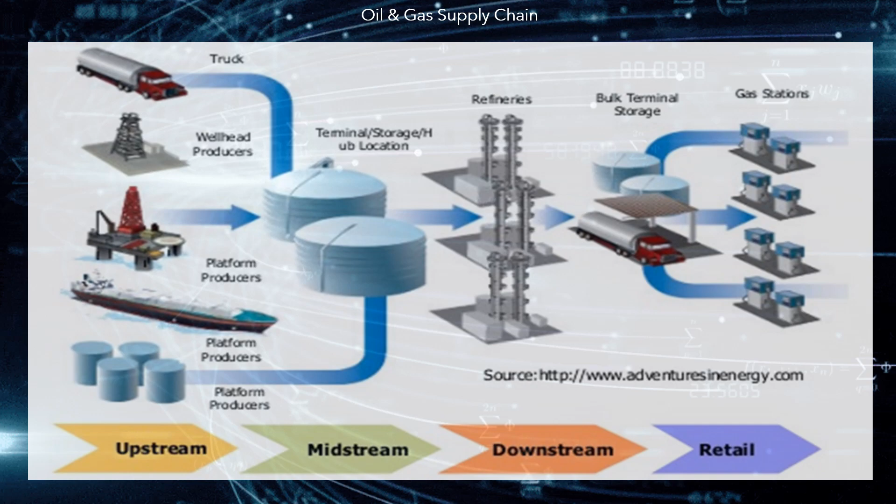HAi is a company at the forefront of high-performance artificial intelligence. Oil and gas industries enterprise-wide optimization. Oil pipeline real-time optimization. Oil supply chain optimization. The oil and gas supply chain is made up of 4 links: upstream, midstream, downstream and retail. The links are connected by multimodal transport networks.

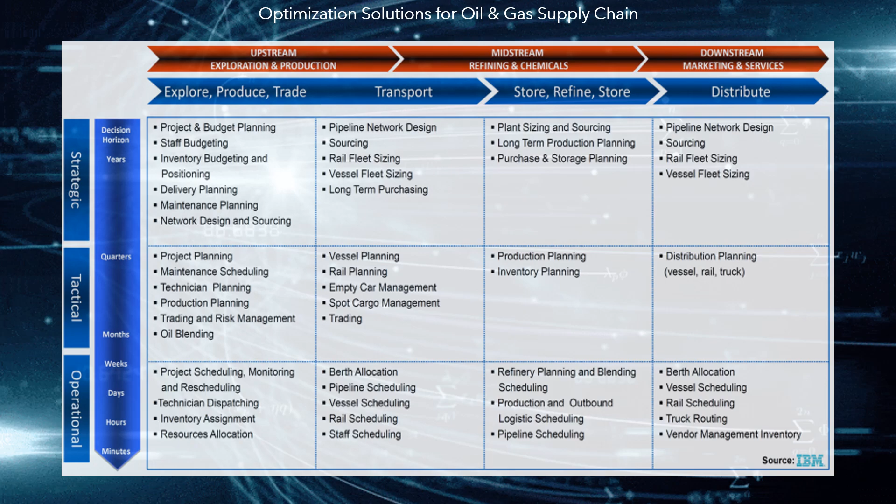The oil industry includes global processes of exploration, extraction, refining, transportation and marketing of petroleum products. The largest volume products in the industry are fuels, natural gas, fuel oil, and gasoline. However, petroleum is the raw material for many chemicals, including pharmaceuticals, solvents, fertilizers, pesticides and plastics. The table, elaborated by IBM, shows a summary of the optimization solutions for oil and gas enterprises.

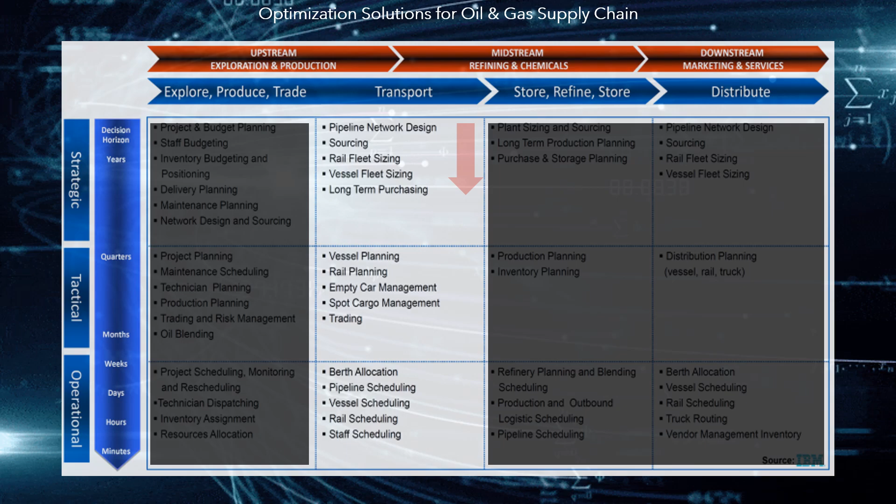Optimization solutions in the transport chain of petroleum products can be classified by their hierarchy: strategic, tactical, and operational. Several of these applications will be discussed below. Oil enterprise-wide optimization integrates mathematical models for each of the links in the oil supply chain, in such a way as to manage the planning of the supply chain with a holistic vision. The design of HAi Oil EWO was the result of work done for a multi-business oil company.

The union of models, and their coordination, forms the hypothalamus of an oil enterprise. The current computational power allows modeling the supply chain in detail, considering individually all the systems that compose it. This allows visualizing all the existing bottlenecks that affect the maximization of economic gains. All models developed by HAi to support decisions in the oil industry are interconnected through an information system. In this way, the construction of an artificial hypothalamus is a question of joining the equations that make up the different models.

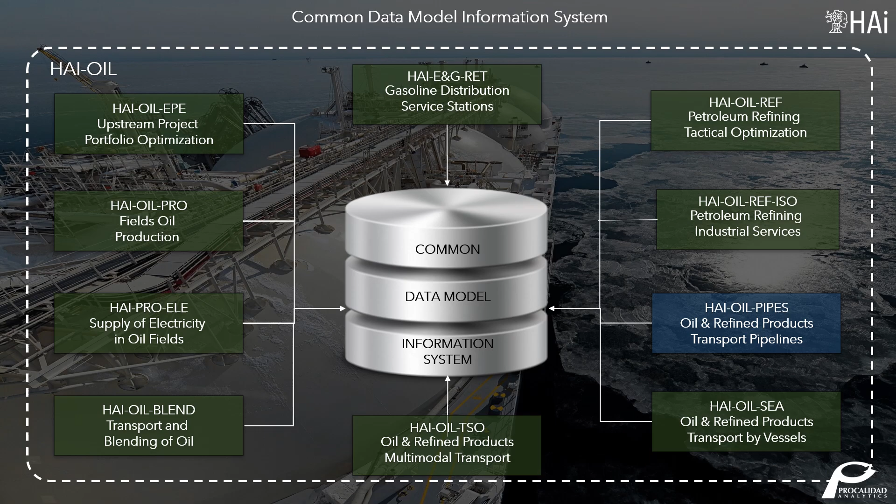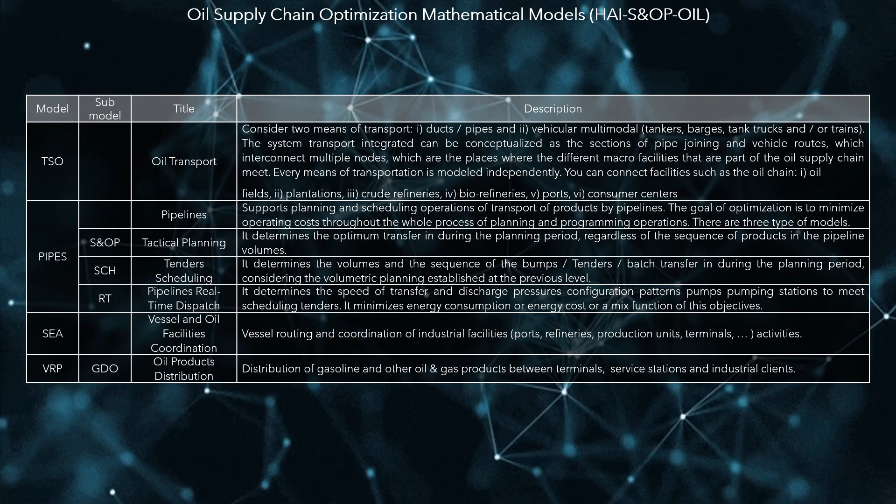Oil transport systems optimization corresponds to a general model, common to all types of oil products, raw, refined, natural gas and biomass, which represents the process for a specific system, including particular equations when this is required. It considers 2 types of transport modes: pipes and multimodal vehicles, like vessels, barges, train tanks, and/or truck tanks. The table presents a summary of the mathematical models developed by HAi for oil and gas transport optimization.

Pipelines planning and scheduling. The problem of optimization of pipelines involves safe, reliable and economical operation, in which, for each moment of the planning period, the flows, pressures and configurations of the pumping stations must be determined, according to the different types of products that must be transported through the pipeline network. The goal of the operation moves between 2 criteria. Minimize energy consumption, environmental criteria, which is important to preserve the sustainability of the planet. Minimize the cost of energy, economic criteria, which is important in energy markets where rates change throughout the day.

On the other hand, the technical operating conditions, hydraulic conditions along the pipelines and at the pumping stations, must be respected regarding the flow of multiple different products that must flow through a network of pipelines that involves the synchronization of multiple sections that connect several production fields, refineries, and ports. The planning and scheduling of transport operations of products through pipelines, oil and refined products pipelines, aqueducts, gas ducts, and mineral pipelines, is done using 3 coordinated models.

Sales and operations planning, S&OP, determines the total optimal volumes transferred during the planning periods, regardless of the sequence of products in the pipeline. Scheduling operations, SCH, determines the volumes and the sequence of batches to transfer during the planning period, respecting the volumetric planning established in the previous model. Real-time optimization, RT, determines transfer speeds, discharge pressures, and pumping stations operation patterns, to meet the scheduling of batches. The equations in the 3 models are virtually the same. The difference is in the way the energy losses are calculated, and the operations of the pumps are handled.

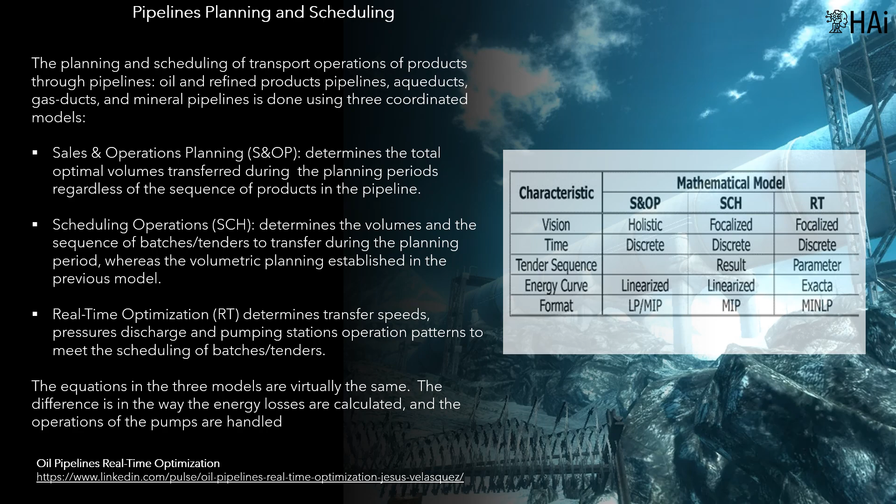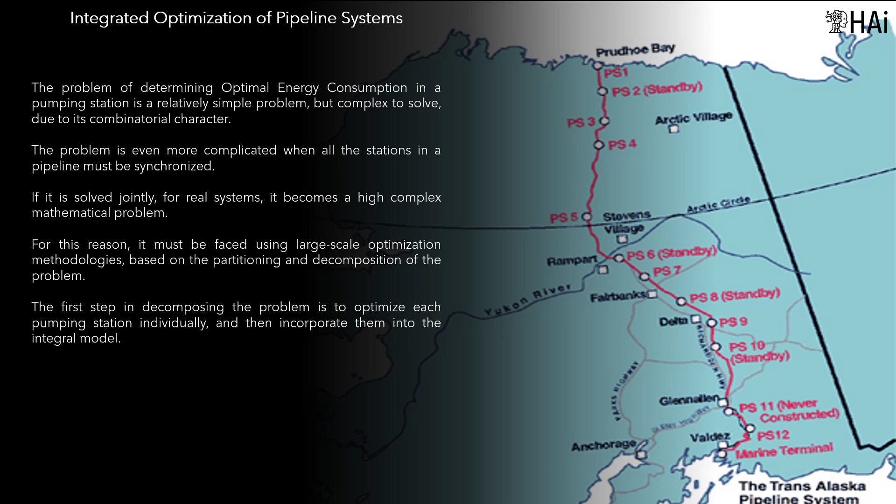The integrated optimization of pipeline systems requires that all the pumping stations be considered jointly. For real systems, it becomes a highly complex mathematical problem. For this reason, it must be faced using large-scale optimization methodologies, based on the partitioning and decomposition of the problem. The transportation system has two fundamental components, the pipeline system and the pumping stations. The real-time models include nonlinear modeling that determines the amount of energy consumed based on the flow of products in the system.

In aggregated models, when multiple types of products can be transported in the pipeline, the total transport time must be divided into the time used to transport each type of product at different transfer rates. To represent the flow of energy through the transport system, the following constraints should be considered.

Energy conservation in the ducts and nodes of the system. Minimum pressure limits, or compression, at the outlet of the ducts, and pressure, or compression, minimum input to the ducts, depending on the type of connection between the operational area, node, and the duct.

In the real-time model, a detailed hydraulic system is available in the pump operation model, for each type of pump in the pumping system, and each link in the pipeline, for each type of product or crude. This ensures the feasibility of the results.

Drag reduction is a physical phenomenon that causes friction to be reduced, and fluid flow to be increased. Chemicals that reduce drag are known as drag-reducing agents, DRA. Several polymeric compounds can reduce the wall shear stress of flowing liquids at low concentrations.

Thus, the use of DRA has the following advantages: increased pipeline capacity, the throughput; savings in pumping power; pressure reduction with the associated reductions in pipe thickness and pressure surge; and reduction in pipe diameter in the design phase, as well as the number or size of pumping facilities.

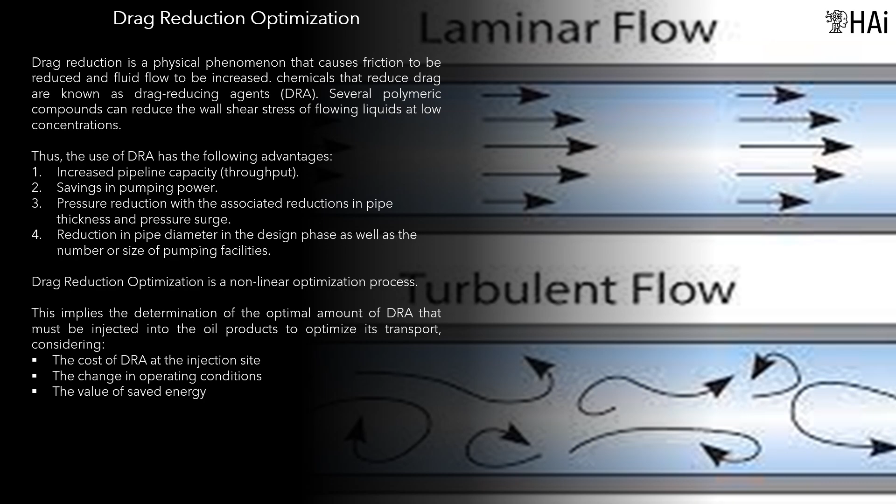Drag reduction optimization is a nonlinear optimization process. This implies the determination of the optimal amount of DRA that must be injected into the oil products to optimize its transport, considering the cost of DRA at the injection site, the change in operating conditions, and the value of saved energy.

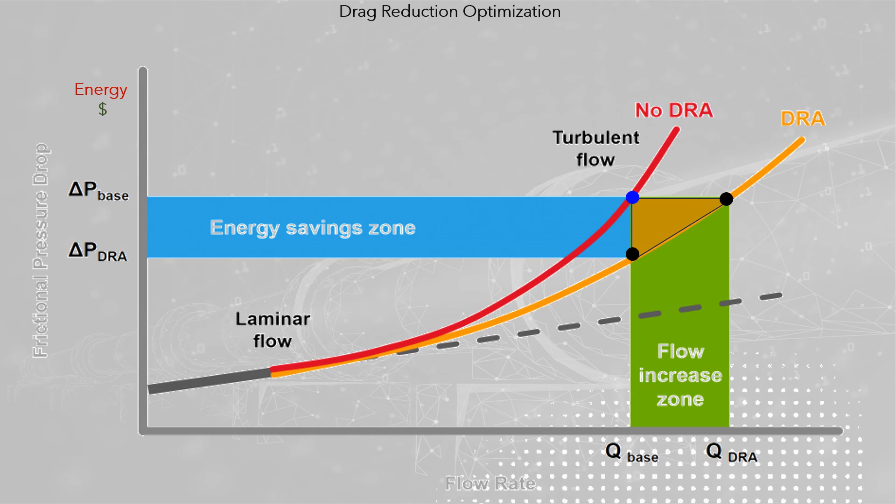The triangle defines the possibilities of operation. For a given level of DRA, the optimal solutions will be over the yellow line.

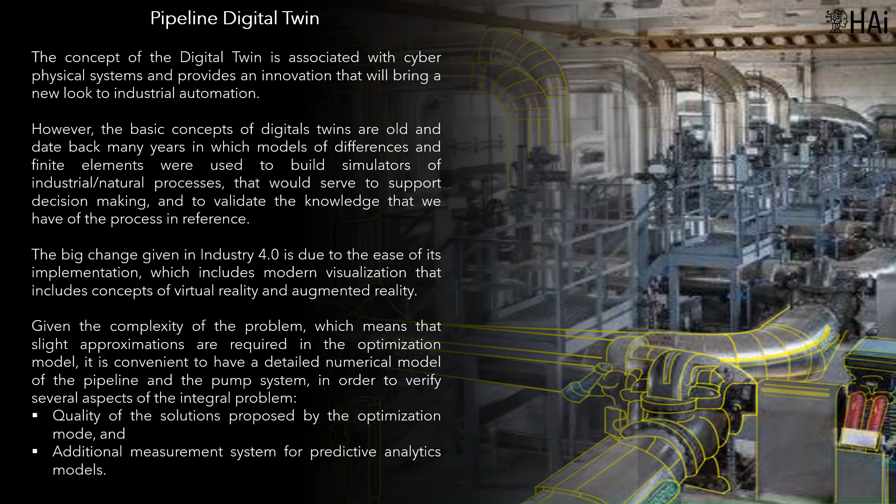The big change in Industry 4.0 is due to the ease of its implementation, which includes modern visualization, using virtual reality and augmented reality concepts.

Natural gas supply chain optimization.

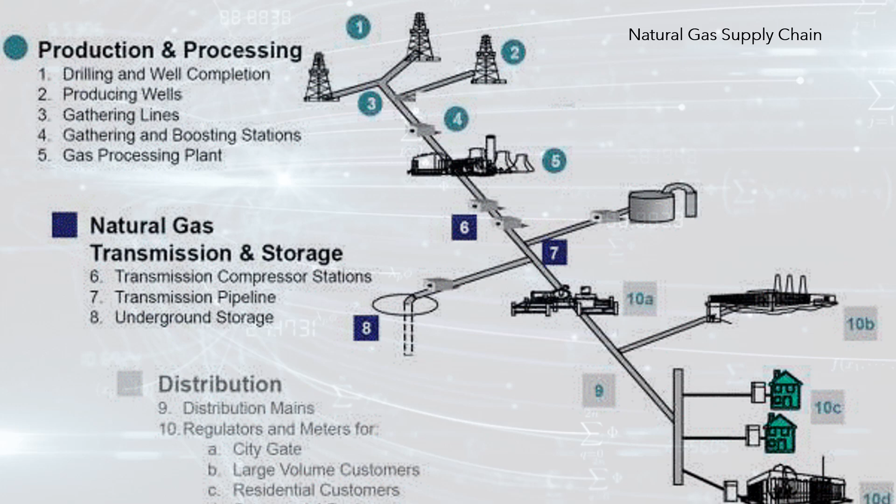Similarly, like oil, natural gas supply chain may be modeled as an optimization mathematical model to simulate the transportation and storage of natural gas. The diagram presents the natural gas supply chain.

The main features are: natural gas is produced in gas wells, or as an associated product in oil and gas wells. The marketing of gas implies that it can be transported massively by means of gas pipelines, or in ships. For this it is required to turn it into liquid, in liquefaction plants, and later converted back into gas, in regasification plants. This usually happens at terminals in port.

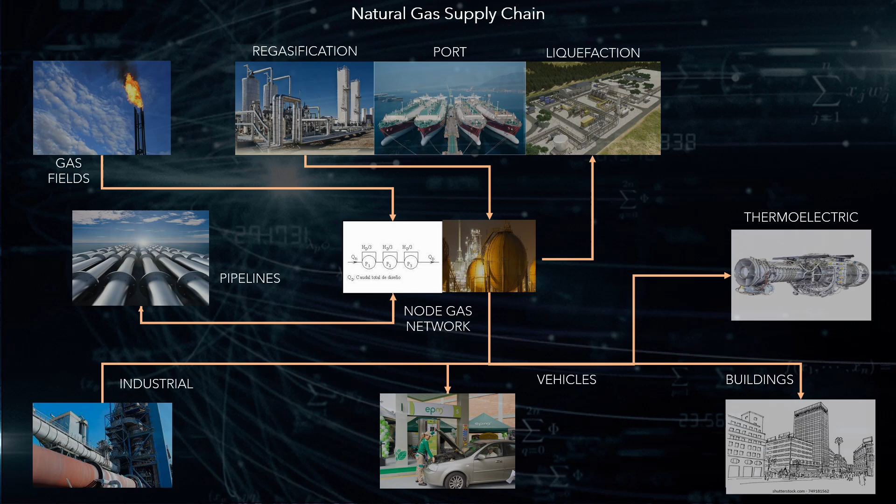Transportation through pipelines requires gas compression stations. Finally, the gas is delivered to a market, usually segmented, in industrial, vehicular, residential and commercial, and thermoelectric plants.

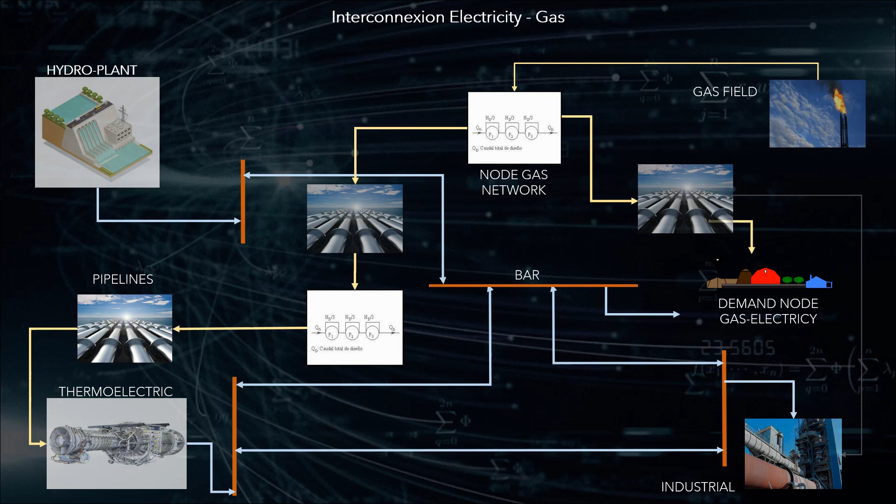As integrated products, electricity and gas must be modeled together. As a basic energy, natural gas is a raw material of electricity, and in turn, as useful energy, it is competition of electricity. The optimization model includes the following types of nodes.

Production fields. Consumption center, natural gas demand nodes discriminated by demand sector, among which are industrial, vehicular, electricity generation, commercial, and residential, and ports and terminals that can receive and/or send LNG. It is associated with liquefaction and/or regasification plants.

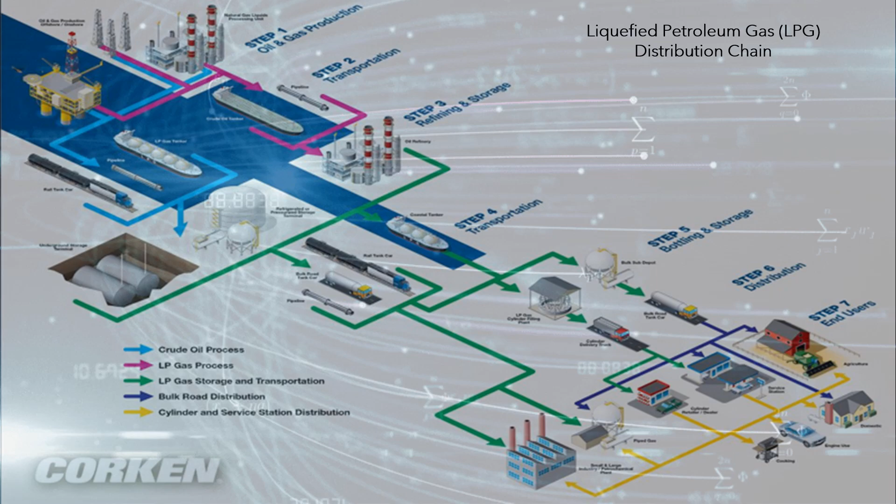Similarly, like oil and LNG, liquefied petroleum gas (LPG) distribution chain may be modeled as an optimization mathematical model. Liquefied petroleum gas distribution chain optimization.

A mathematical model for distribution planning and propane gas container gathering. It is aimed at supporting the weekly and daily programming and operational rescheduling of trucks dispatch. The modeling hypotheses are as follows.

Fleet of vehicles consisting of multiple types of trucks and multiple types of LPG trailers. Trucks can be moved with or without trailers. A truck can tow some type of LPG trailer. LPG trailers can be dispatched with or without charge.

Vehicles move between nodes, or terminals. In the nodes there may be demands that must be met, or purchases that enter LPG into the system, and LPG storage tanks may exist in the nodes.

It is associated with liquefaction or regasification plants. Financial planning in oil transportation.

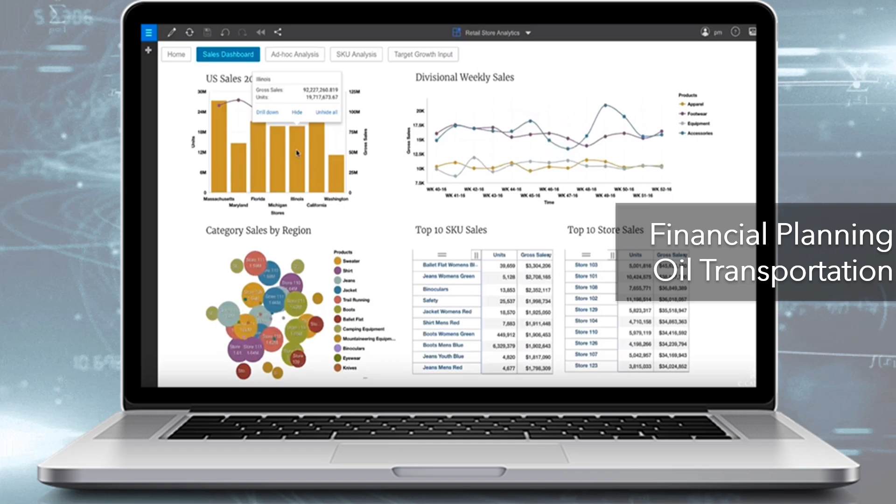Integration of financial planning to the pipeline optimization model, to obtain in real time the projection of the end of the current month or year, the budget or long-term projections of costs, financial statements, P&L, cash flow and balance sheet, and monitoring of budget execution and financial analysis, facilitating the analysis of information and the decision-making process.

Solution powered by artificial intelligence, which significantly reduces the time required to carry out financial planning and analysis processes, by integrating real-time data from multiple sources collaboratively and simulating different scenarios to solve strategic business questions through a self-service dashboard. It unifies and streamlines planning, budgeting, forecasting, and optimization across the organization.

The objective of financial planning is to simulate the assets and liabilities management, considering the results provided by sales and operations models. It is a modeling consolidated methodology that focuses on the financial modeling of companies.

The minimum financial modeling should be oriented to evaluate the NPV for a pre-established ROI, return of investments. It will provide the financial statements, balance sheet of assets, liabilities and equity, income statement, profit and loss after tax, royalties and other contributions, and cash flow.

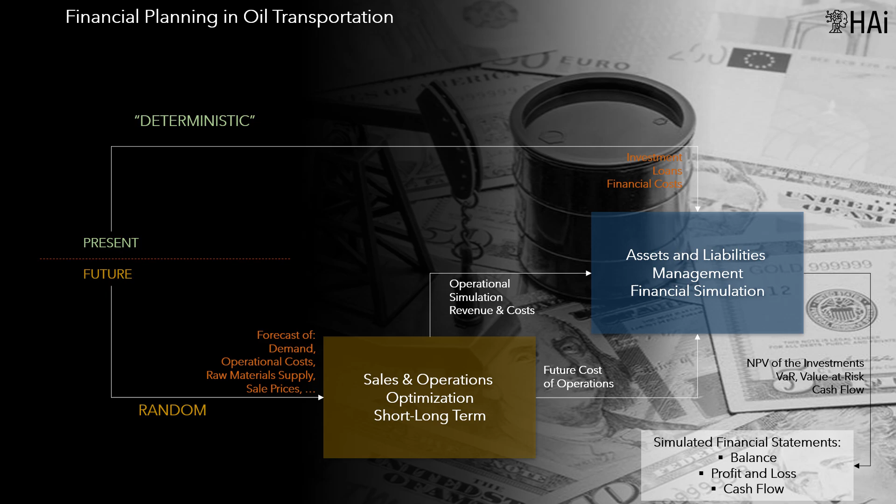Numerical simulation model of the digital twin. It corresponds to the physical model that exactly reproduces the behavior of the piping and pump system, that is, the flow of different types of products in the different sections of the pipes.

And of the operating conditions in the pumping stations, for each pump configuration pattern, in series and or parallel, for each type of product, for any pump speed. This model is integrated as a physical model to predictive analytics methodologies, specifically the Kalman filter, and as a basic model to generate the approximate model that is part of the optimization models.

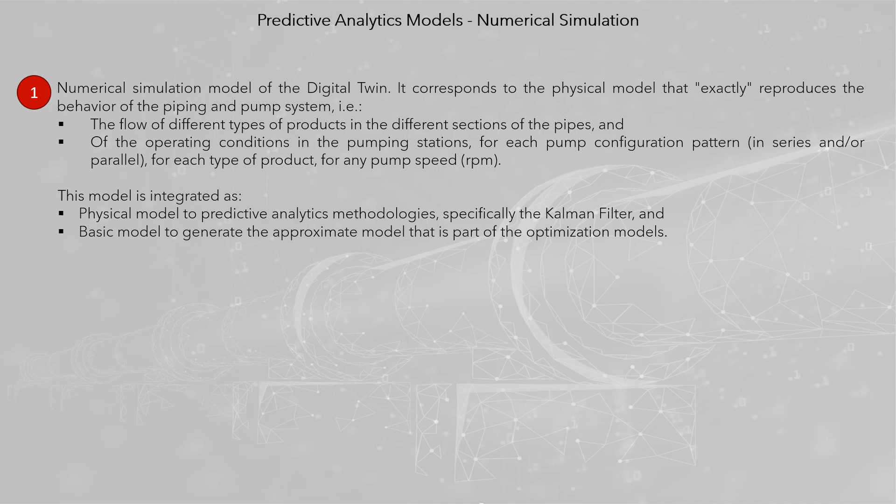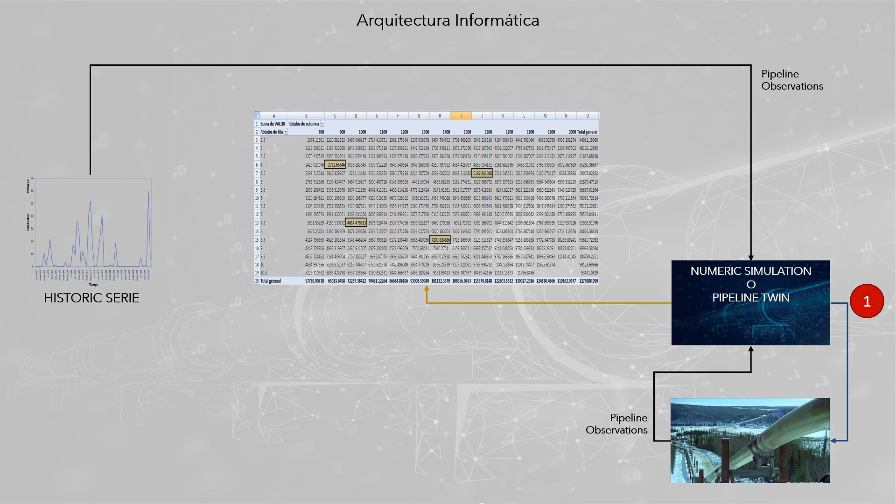The numerical simulation model produces matrices, or tables, that are the reference of the exact operation of the piping system and pumping stations, and these tables numerically represent functions of the energy consumed as a function of pressure, flow rate, product type, DRA injection, ambient temperature, etc.

Validate and correct advanced analytics models, mainly optimization models. State estimation models the prediction of estimation of the variables that represent the state of the system. These can be pressure, flow, RPM, roughness, density, etc., and physical model parameters, estimation of the parameters involved in the

equations that represent the physical system, and which are subject to uncertainty. It is considered that the appropriate methodology is the Kalman filter, KF, including some of its variations and extensions. KF is, perhaps, the oldest and most robust methodology of hybrid predictive AI.

The numerical simulation model can be used to generate synthetic operation samples, as it is assumed to correspond to the exact representation of the system, and thus enrich the database. Very useful in the case of young systems with few historical measurements.

Prescriptive analytics. To optimize are required the following models: the operation, dispatch, of the pipeline, at least 1 or 2 days in advance. This implies a real-time operating model, whose planning horizon is divided into periods of hours, fractions, and which can be redispatched at any time, and the transport of hydrocarbons in relation to nomination, DRA dosage, energy consumption month by month.

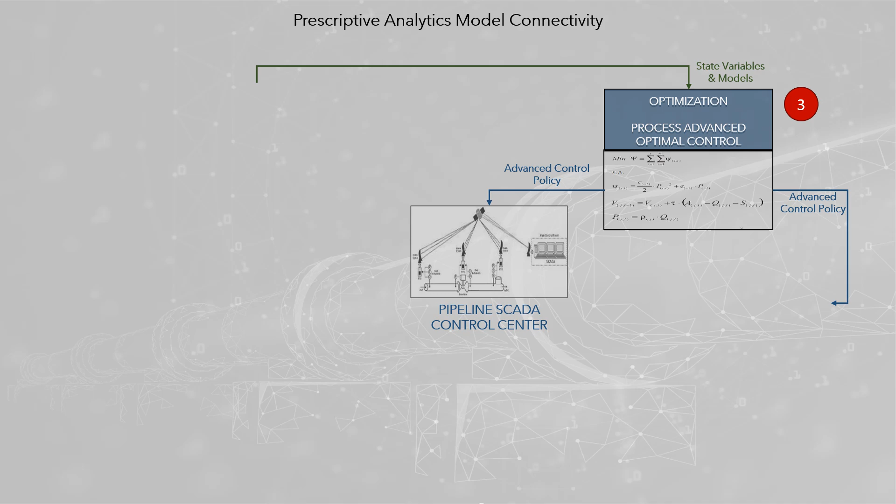The results of the models, mainly the real-time ones, must feed the databases of the SCADA system, or distributed control. The image presents the IT architecture of the proposed solution. The mathematical models will be analyzed later. The HAi methodology involves linking predictive and prescriptive artificial intelligence methods, to give rise to decision-making artificial intelligence.

Pipelines energy modeling. Predictive analytics models, forecasting. Based on hybrid models, model-driven plus data-driven, supported in state estimation methodologies, more specifically improvements and variations of the Kalman filter, KF.

Overall, the minimum functions of these models are smoothing, filtering and forecasting of the viscosity value of the crude oil transported in real time at any point of the pipeline, taking into account that, on a daily basis, laboratory tests are carried out to establish the viscosity value that is being transported. This actual viscosity data is confirmed a day after the shot by analysts.

Smoothing, filtering and forecasting of the viscosity value of products in real time, assuming that an inline viscometer is available. However, the measurement of this is not exact, but it maintains precision, and allows you to verify the trend of the measurement. Identification of the operating periods during which, due to the quality of the product, density and viscosity, the dosage applied affected the transport of hydrocarbons.

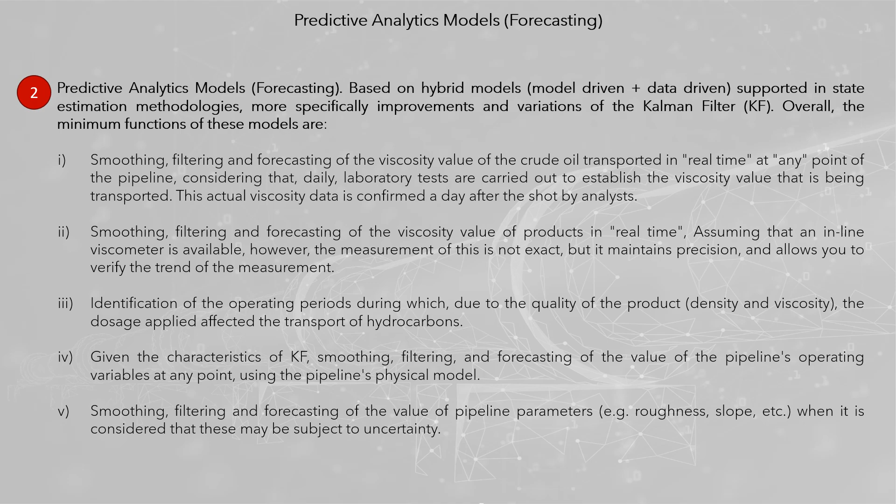Given the characteristics of KF, smoothing, filtering, and forecasting of the value of the pipeline's operating variables at any point, using the pipeline's physical model, and smoothing, filtering and forecasting of the value of pipeline parameters, e.g., roughness, slope, etc., when it is considered that these may be subject to uncertainty.

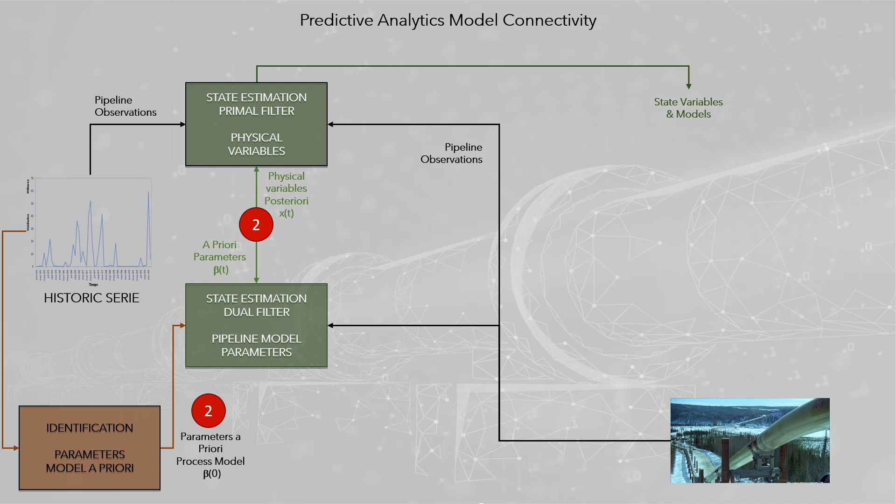As a general rule, it is considered appropriate to use an extended Kalman filter, or a dual Kalman filter, to simultaneously estimate state variables, and the parameters of the equations.

Data-based algorithms only consider the database of observations, historical or synthetic, to determine the dynamic prognosis of the physical process. Normally, the related professional is a data scientist.

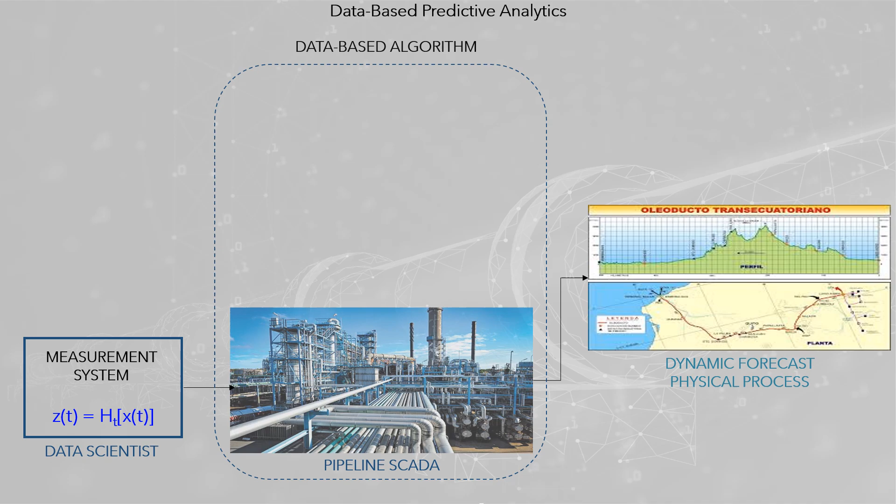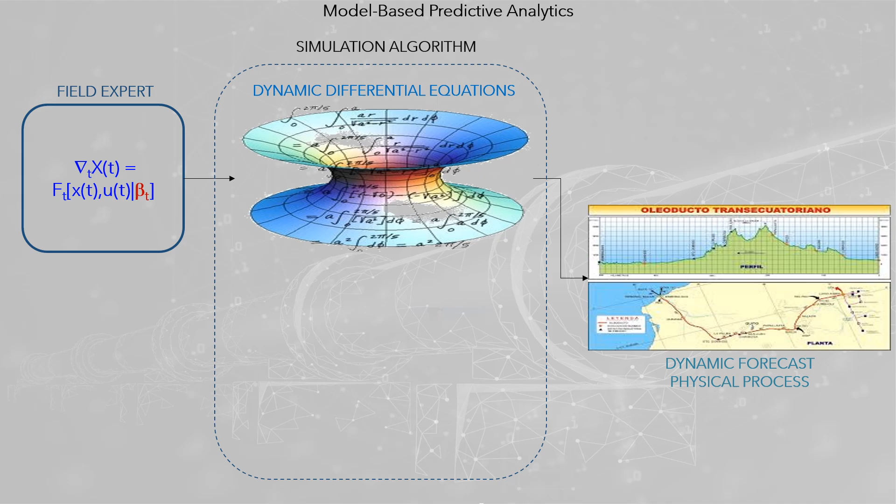The integration of the two approaches gives rise to hybrid predictive analytics, which can be considered as the appropriate method, that takes advantage of the mathematical knowledge of the physical system, and historical information.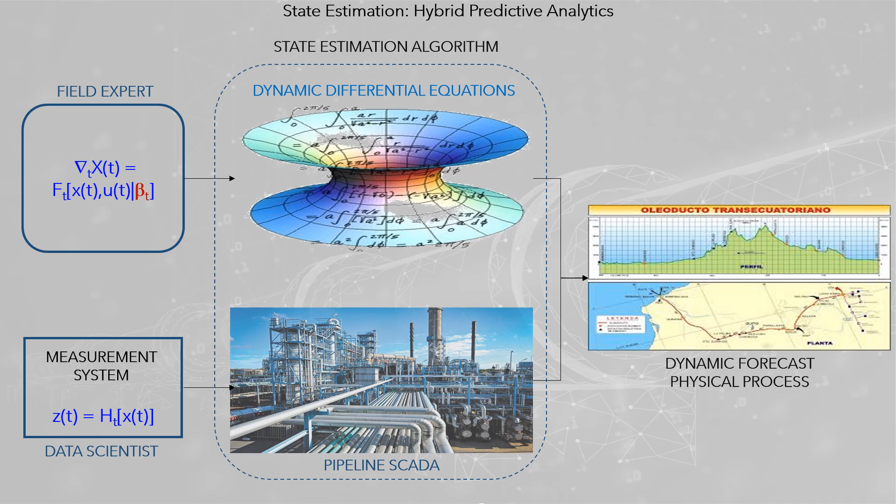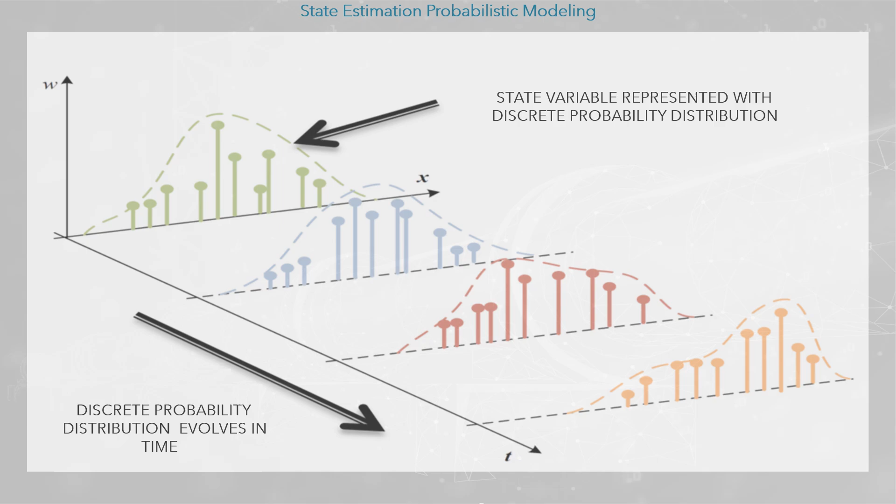The most well-known method, and most used, for more than 65 years, is the Kalman filter. The state estimate describes the system based on state variables, characterized by discrete, empirical probability distributions, and dynamic, empirical, probability distribution functions that evolve over time.

Forecasting, predictions about the future, and filtering, predictions for the present. In a system under uncertainty, correcting the past may be just as important, if not more so, than forecasting the future and estimating the present.

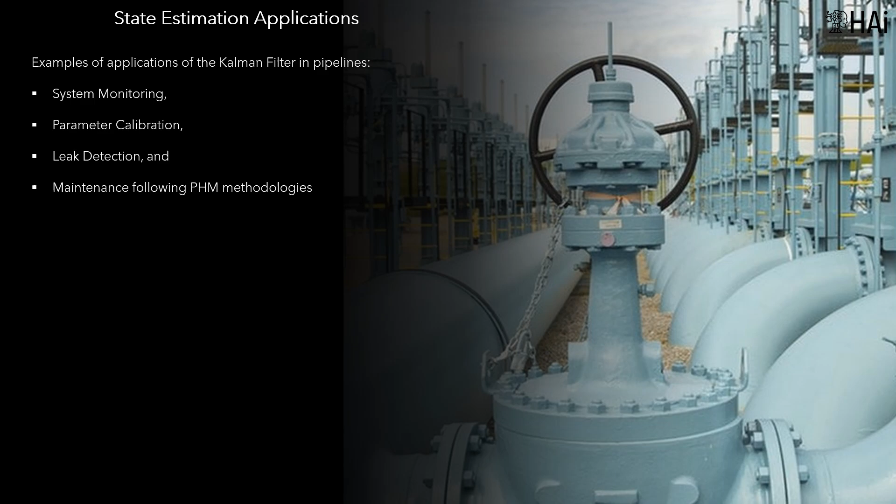Examples of applications of the Kalman filter in pipelines are system monitoring, parameter calibration, leak detection, and maintenance following PHM methodologies. Kalman filter applications in oil and gas pipelines.

Those interested in learning about Kalman filter applications in the petroleum industry, we invite you to watch the video series Oil and Gas State Estimation Using Kalman Filter. This video discusses use cases of the Kalman filter throughout the petroleum supply chain. It is formed by the following parts: Part 1, Kalman filter framework; Part 2, oil and gas production; Part 3, oil and gas transport by pipelines.

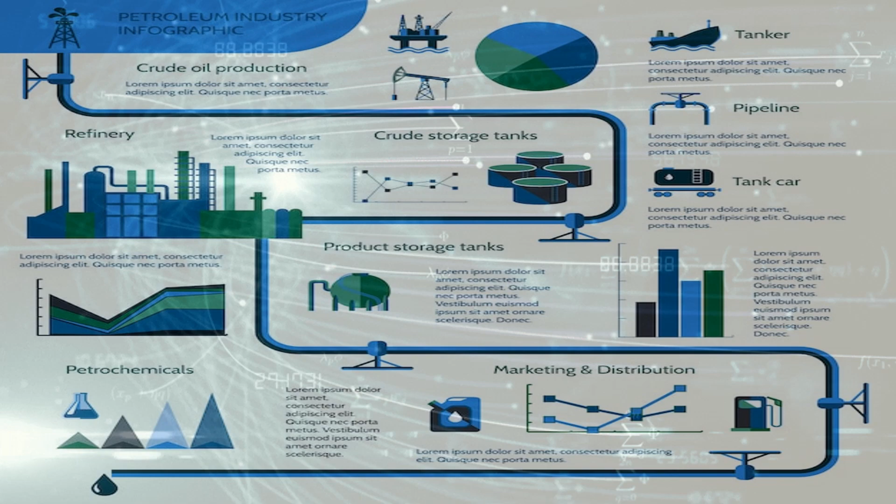It should be noted that the applications of the Kalman filter in the petroleum industry are not limited to the cases presented, they cover the entire supply chain. In the case of pipelines, the main applications are estimation of the operation profile, and leak detection in pipelines.

Success case, China National Petroleum Corporation. The paper Operations Research Enables Better Planning of Natural Gas Pipelines presents the use of mathematical optimization models for pipeline planning.

China's natural gas consumption has nearly doubled in the past 5 years. To better meet demand, the China National Petroleum Corporation, CNPC, China's largest producer and supplier of oil and natural gas, partnered with researchers from the University of California in Berkeley and Tsinghua University in Beijing to apply operations research to develop and implement new software to help CNPC improve the management of its pipeline network.

Previously, all pipeline production and construction planning for CNPC, which controls 72% of the country's natural gas resources and 70% of its pipeline network, was done by traditional methods using spreadsheets.

However, due to the increasing size and complexity of the network, the use of the traditional method resulted in excessive costs and wasted resources. Since implementing the new software, which uses a 3-stage convex relaxation method and iterative piecewise linear approximation methods, in late 2014, CNPC has obtained approximately $530 million in increased earnings, 2015 to 2017.

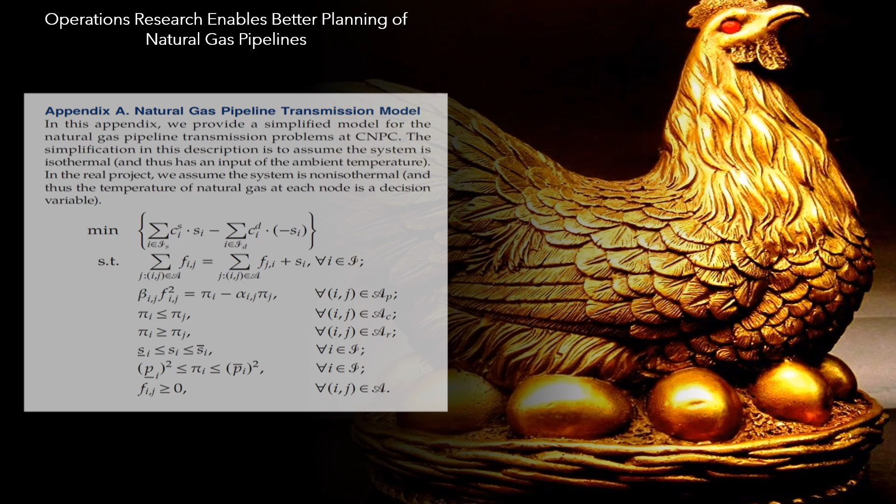The image presents the algebraic formulation of the natural gas pipeline transmission model. Without fear of being wrong, it can be said that mathematical optimization models are the goose that lays the golden eggs of China National Petroleum Corporation.

Like Herbert Simon, Hypatia Artificial Intelligence and Predictive Analytics believe that computer-based mathematical modeling is the greatest invention of all time. Thank you for your attention.